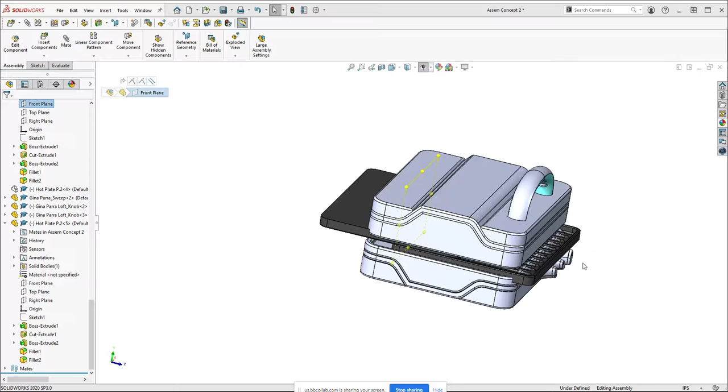So just check your mates. It seems like these hot plates maybe need to be mated with their front plane. I didn't catch that in my notes initially - I mainly looked at this file. You were one of the people where I wrote the note about combining fillets, so just being aware that if it's to the same body. Honestly, some of the stuff you kind of did already. That makes sense.

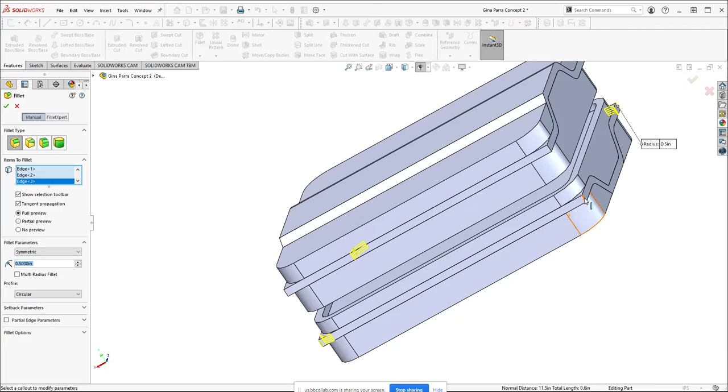Some of the fillets I just had to do one by one because I was trying to select two different faces and it wouldn't do it, so to avoid any issue I did a face fillet. I missed that - was it not working with a regular fillet? No, I don't know, I just found it easier to match the rest of the body. Got it, so really when I did the face fillet...

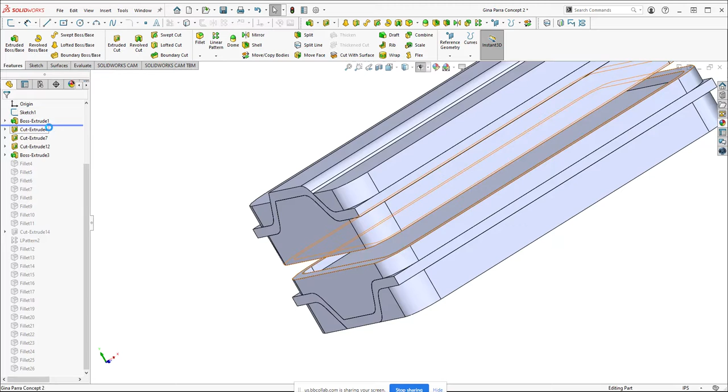I see, okay, so based on that then specifically it would make sense to... I forgot to restart the timer. It would make sense to... let's see, so you started here. This is good, so instead of these cuts being like that, the cut makes sense to me, but for these ones, I see though - this one you had to come up higher. Okay.

One thing you could do if you want to match this exactly would be to create a sketch on the top plane, copy this sketch over - I'm selecting the first boss extrude. Now I'm making a rectangle that's bigger and then doing an extrude cut, so now it's based off the exact same sketch. Now I'm only going to select the two pieces you want to match in the feature scope.

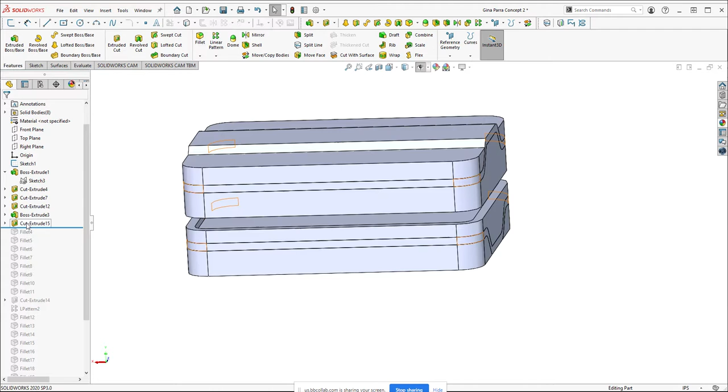So it's only going to cut those two bodies, and again you're not losing points on this - this is just me trying to help you in SolidWorks get to your goal quicker. Does that make sense? Yeah. But I mean, going by fillets is fine - I would encourage edge fillets over face fillets where possible. Face fillets are good if it won't resolve, but you should be able to match these also with an edge fillet if you know this value in the sketch - it looks like it's 0.9.

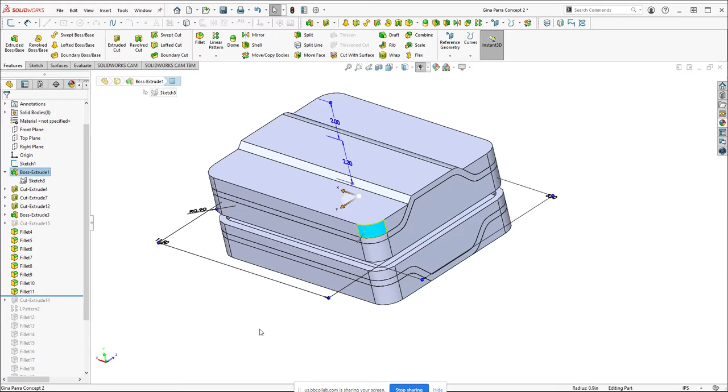Other feedback I had, but again that's not a points thing - I did make a comment on modeling in half for you. So sometimes the feedback is like do this, not necessarily how to do this, but it would possibly mean - and again it's up to you to determine whether you want to invest that time. It's worth 0.6 points. It would look something like this. I would save a copy of the file - oh, that actually rebuilt really well, I didn't necessarily expect that.

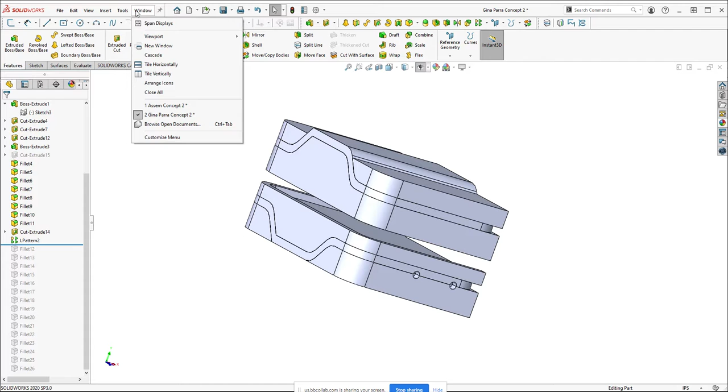Starting here and then putting in - let's see, where would it make sense to put in a reflection? Does that make sense? Yeah. Then the last comment that I have is - again, everything was pretty good. Again, the main thing is just when I see a lot of fillets, sometimes I wonder.

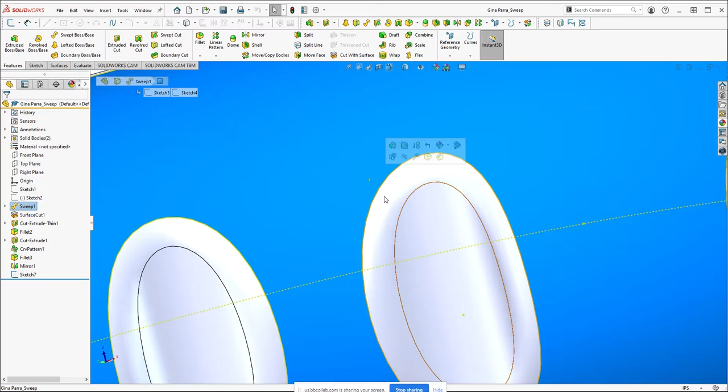The last comment I have is to the handle - I'm assuming you did this body discoloration for rendering, is that right? Yeah, that's okay for this project, but moving forward try to avoid doing that. It won't look as real if you don't have a part line between materials, if that makes sense. It is a good trick, it is a good workaround, I totally do it all the time as well - the face thing. But in general, for realism, if you're having two different materials, it's better to have them separated by something like this.

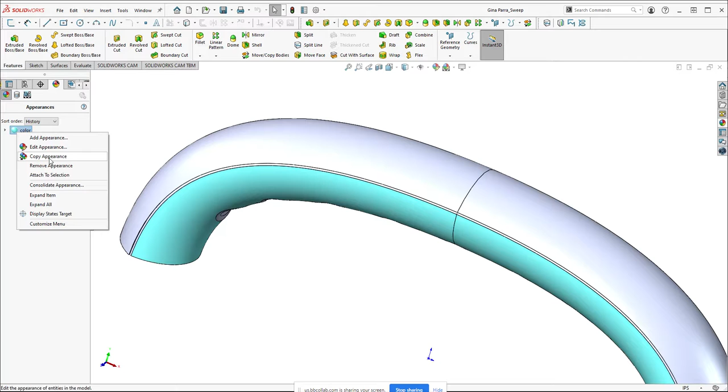I did it just so when I exported to Keyshot, it was easier for Keyshot to know that will be two different materials. Got it, I mean typically, what I'm nitpicking is like this material being different than this one, right? Oh okay, so then I will just do another cut, right? If you wanted this front and this back to be different, the better way to change this color would be to apply it - I'm actually going to just remove the material, edit this and do it to the body. Right click on this material and select body, not face, and now if you select this light blue, it'll apply to the whole thing.

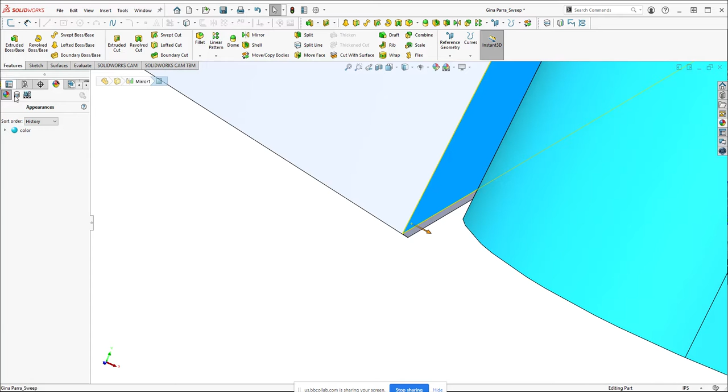Oh, okay, I'm just noticing this now. I would put a fillet on here and double check this. This hanging edge is happening because of this cut, you need to just extend it. You just need to grab this point and drag it down, and that should get rid of that extra tab in there.

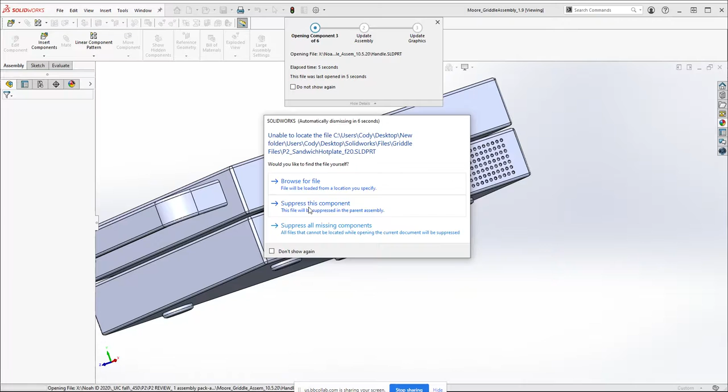Okay, now I did have a note. I should have emailed you, and I apologize. From last class, you had asked about the loft of the slide, and the slide file was missing, so I wasn't able to, or maybe there was no slide in this, so I wasn't able to look at that.

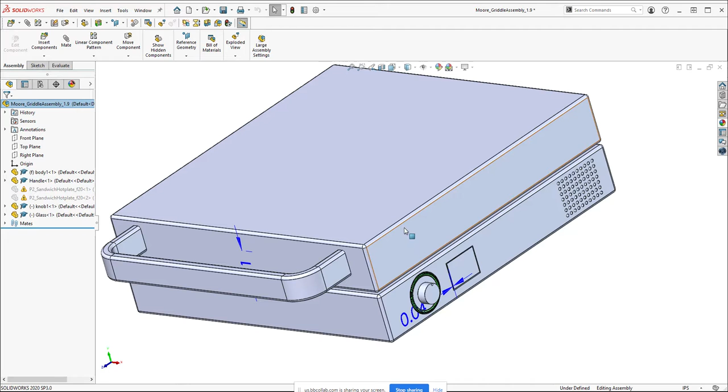But yeah, for you, I'm trying to interpret my notes here. I have something that says MS handle, I'm not sure what that means. Oh, master sketch - you don't have a master sketch in your handle.

Also for you, your handle is not a logical sweep because this could be extruded up and down. So the simplest fix for you would be, I realize this is not maybe purely Dieter Rams, but I think you could make an argument that having slight curvature to the back would make it more comfortable to grip. So adding just even the slightest curve on the back here. And again, I realize I have convoluted rules, but I want you all to understand when it makes sense to use a sweep and when it doesn't. Right now this handle makes sense to be extruded as you had it initially.

So does that feedback make sense? Yep. Without this addition, I would subtract points on the logical part of this sweep. And then, yeah, I mean, you would lose points for not having a master sketch.

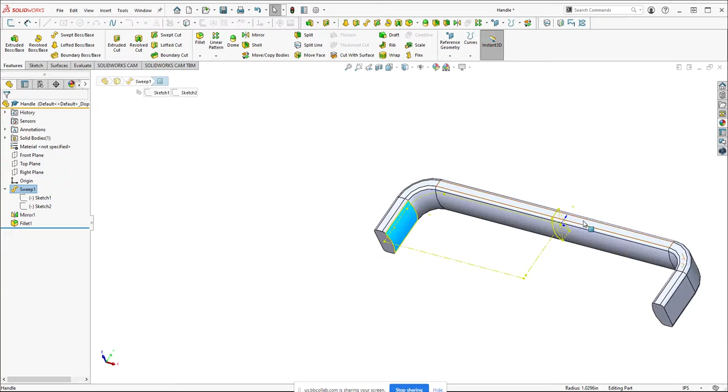Go back and look at the demo. I mean, basically this could be part of the master sketch. The good news is it's a relatively simple file to update that. The next feedback I had, and again, generally everything was good on yours, I think.

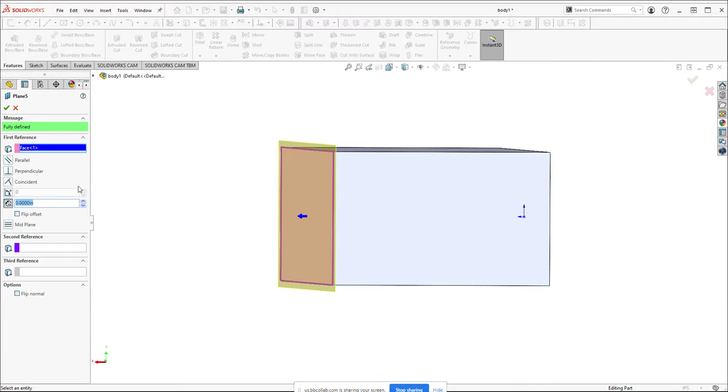I have a comment that says plane 5 is not necessary. Did you understand that feedback when I was talking to the whole class? Again, I don't think you were the only person that did this. Yeah, I understand - to link that to a master sketch to keep the plane mobile, and if you adjust master.

Cool, yeah, I mean, or you can sketch directly on the face. I'm assuming - I don't know what plane 5 was used for. Cut extrude 4 is where it was used first, I think it seems like. Yeah, I got that, I just didn't know you could sketch on face, so I'll make sure to do that.

Cool, and yeah, some of these things, it's like things I forget to say, and it's very possible - that's why I like doing this, because we catch things. Okay, yeah, I think that's all I had.

So let me just double check the assembly one last time. But then we would have roughly a minute left for your question. Let me just drag on things. Yeah, you are good. Okay, yeah, what question do you have?

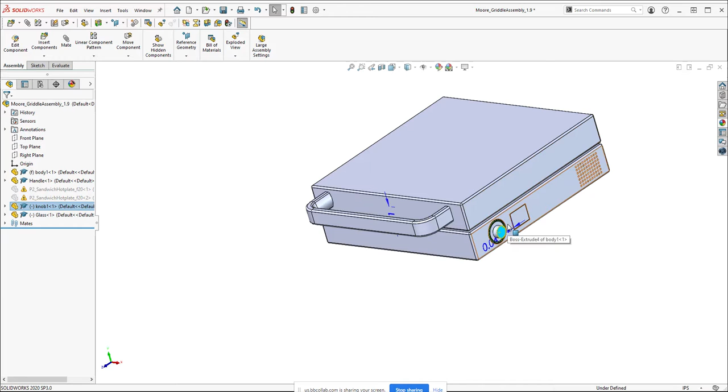Okay, so in that square extruded cut there, I had another part that I added for another part file, for glass or like a clear piece.

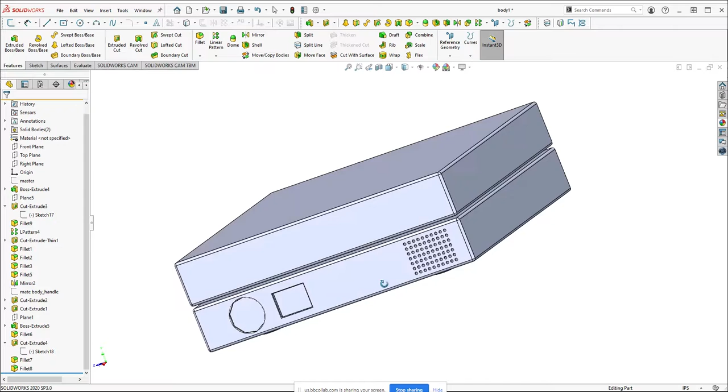In my other designs, I have a metal bracket attached to the body. Should those two parts be in separate part files, or should they be part of the master or the body part of the assembly?

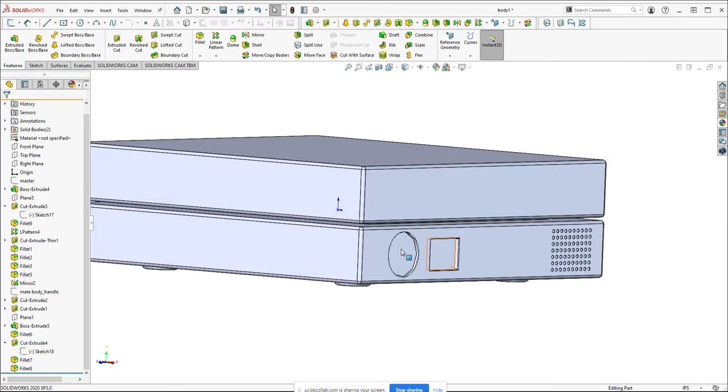Yeah, that's a good question. For this project, there's really no one right answer to that. The short answer is I would have it in this single file.

If you had glass here, I would put it in here personally. I would create a sketch on this face. You could select a face, convert entities on it, and then extrude something like 0.1 deep, or even less, 0.04 or 0.05, and just not merge it with anything. That's the way I would do it.

That's the shortest answer. The reason you'd want it in a separate part file is if, for some reason, you have a screen assembly that an engineer gave you, or you're going into production, you might have that separate. But in this kind of concept stage, I tend to put those things in the same file.

Okay, sounds good. Cool. All right, that's all we have time for. But otherwise, I think everything looked pretty good. So nice work.

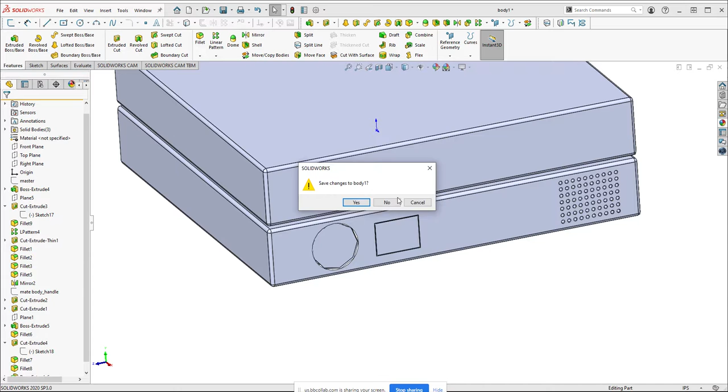And am I still recording? I think everything's going, seems like it's still going. Cool. All right, thanks, Jacob. I'm glad you're there, Jacob.

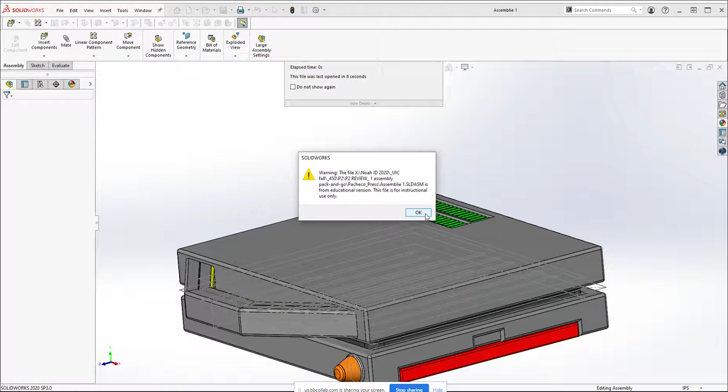Xavier, did you want me to go over something specific, or any specific questions for me, or general feedback? The one thing was, my knob, does that work? Or should I make it like a tiny oval, or have it skewed a little bit so it looks circular?

Because the way I had it here, I feel like this represents the object the most. But if I were to just make it barely an oval, would that work, or is that kind of a workaround?

No, that's fine. If you make it barely an oval, I'll grant it. Again, fully acknowledge it's convoluted, but I want you all to understand when it makes sense to use a loft and when it doesn't. The other option would be like the earlier example I showed, an off-center circle.

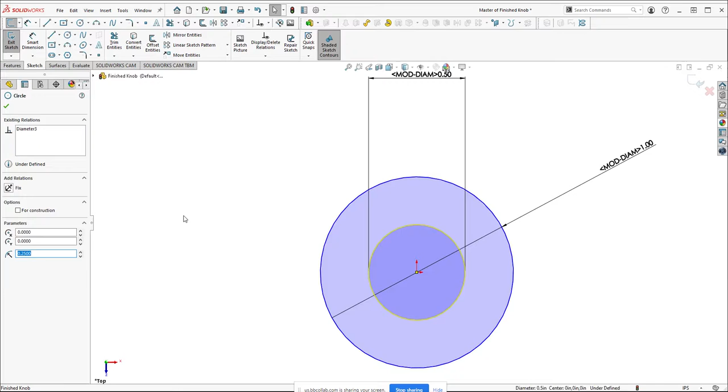Let's see if I can even do this in your master. If you break this off center... nope, they're both attached to each other. I wish there were an easier way to break.

Never mind, yeah, you can do it as a slight oval. If you just drag this circle up like that earlier example I showed, or you can go back and review it since it was recorded. That's one option. I'm glad you brought that up. I'll be honest, I didn't catch that, but I probably would have in grading.

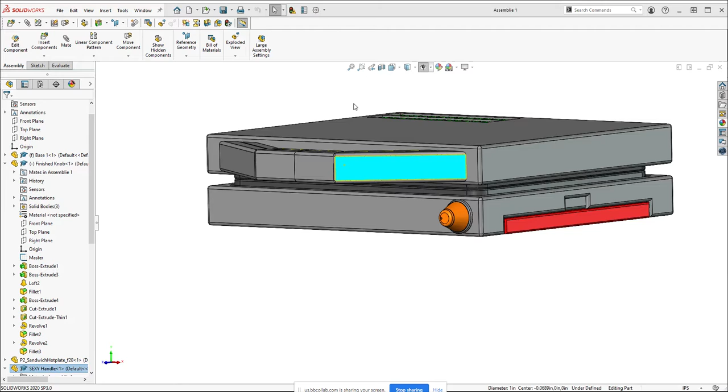Cool, general feedback for you. With the handle, you're another person where I made a comment about the fillets being something that could be combined. This bottom fillet and this top fillet could probably be done in the same command, so just be aware of that. It's not costing you points, but in general you can have a much shorter tree with those fillets.

The next thing is, don't forget to merge. This is mirrored, and I see you have 10 bodies, which is fine, body count's okay. But I'm noticing there's a seam here still. So just be aware that in the mirror command, if you check the merge results—again, not losing points for this, just for your knowledge—

It'll only merge the logical ones. So this left piece will merge to this one, it won't merge front to back.

So I would just check that box. And now you have far fewer bodies, less things to go wrong, I guess, and it's also just better organized for your main body.

I don't think it was built in half, so you may want to do that. No, it wasn't, I realize, again, somewhat convoluted. For you, you would probably want to mirror it fairly high on your tree before you start adding these details and stuff.

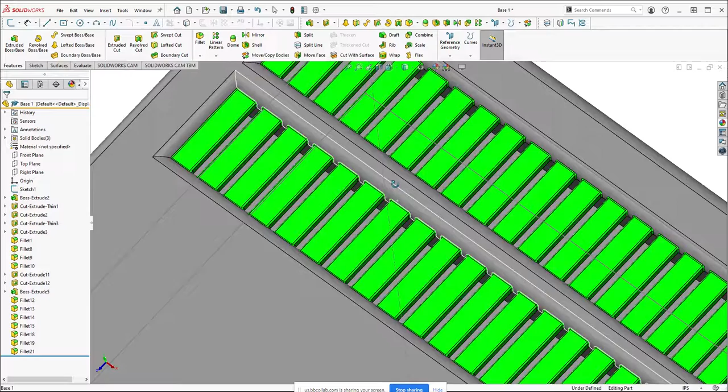But again, it's all just like a habit thing. And then the last thing I have to show you was a question you had asked a long time ago about these. What I did, I think it's in here, is I built... Oh yeah, I was curious if you can angle them a little bit. Yep, I think I was going to ask you that.

Yep, and I think it looks better if you do. It looks more real. And so the way that I did that is with an extrude thin.

So I think what I did in your file is I suppressed it - I think we have time for me to walk through the steps here. I saw where you did this and I suppressed it, then I walked the tree back to this point and selected one of these faces to create a sketch on it. Then I click Normal To, or Alt N is typically what I do, and if you want to see the cavity, sometimes this is where I'll switch to this view.

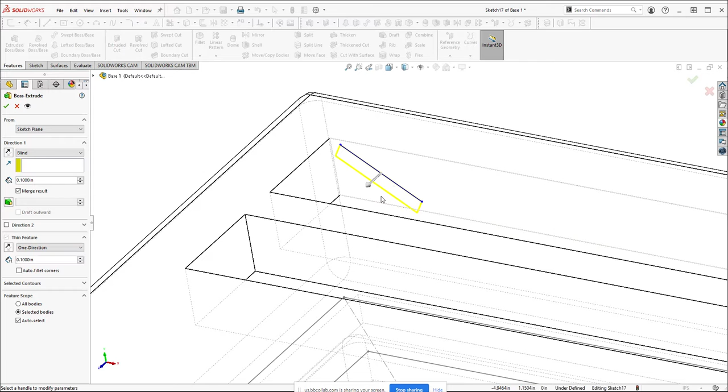And then I just use L for line and create an angle that's like a louver. Then I simply do an extrude thin, so I immediately load a thin command or an extrude command from here. What I think I did is I said up to surface and selected this face. Did that work? Let's switch to this here.

Oh, it doesn't like that. Oh, because I think I made this too long. Let's check and see if that works. Oh, it did work, okay. Yeah, I don't know why that didn't give us a preview. But anyway, to that face, I don't want to merge result.

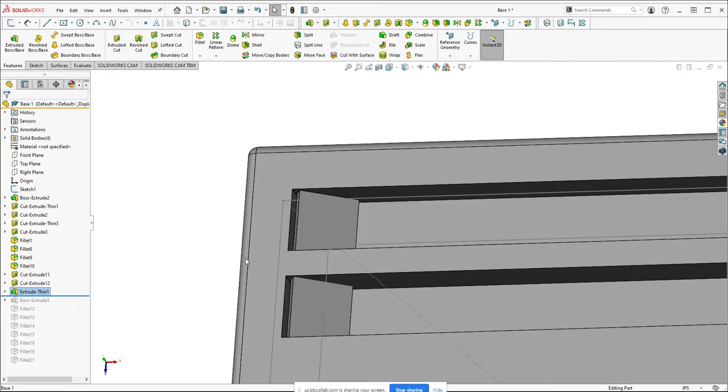And then here we can change the color at this point, so I'll select the body - I think you had it as green. And then I load the linear pattern. For the direction I can just pick this back edge, or probably better practice would be to pick something in the master sketch because there's less chance it'll break.

And then here it always loads features, but we actually want to pattern the body, so I'll click this. And then here it's just a matter of playing with spacing and the number you want.

And I do think it makes sense to angle it this way because I think you're rendering it from this vantage point. If you render it from this other vantage point, you will start to see through it. So those are things I also consider sometimes - like where will it look best from.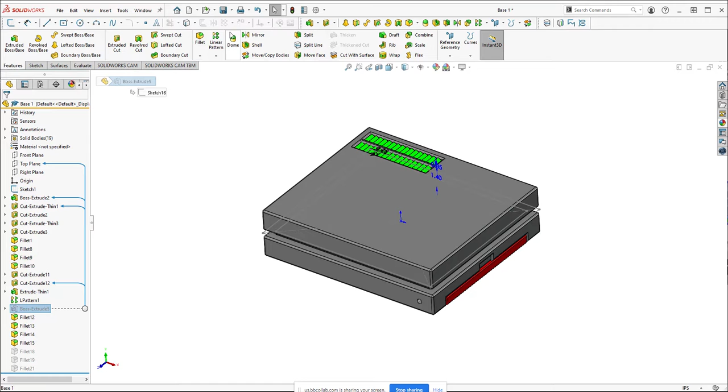Again, I would delete these if you're leaving them suppressed. Yeah, cool, overall nice work. Let me look at your assembly one last time to make sure I didn't forget to drag on pieces. Yeah, you were good. Sweet, nice work.

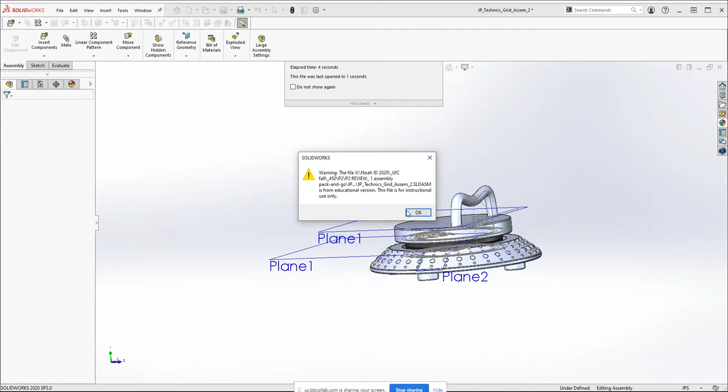Jacob, did you have any specific questions, or did you just want general feedback? Just general feedback. I think I might rebuild the one I sent you just to make the mates a little bit easier, based on the feedback I got from the forum yesterday. I think I might go ahead and do that.

You were kind of talking about doing a square plate with the press just being the kind of angular thing on the bottom. Yeah, square plate, round top kind of thing. Yeah, and then also just any CAD master sketch stuff, if I'm doing that correctly as well.

Okay, so the question I had from last class was you asked about your loft. So yeah, unfortunately this is not a logical loft because this could be revolved. So, okay, go ahead.

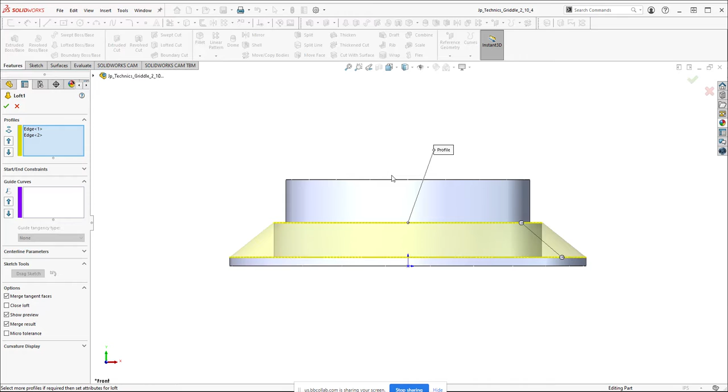Is it necessarily wrong for me to build it that way though, just because it was super easy in comparison, in my opinion? So I mean, yeah, for your own work, I guess no, it's not bad. I mean, there's more of a chance for a loft to fail.

I think if you were working somewhere, or someone was reviewing your SolidWorks work, or you're working with other people, they might question why you did that as a loft. It just doesn't make sense, unless the reason would be if I anticipated the client may want it to be an oval at some point. But anything like this, most people would revolve it.

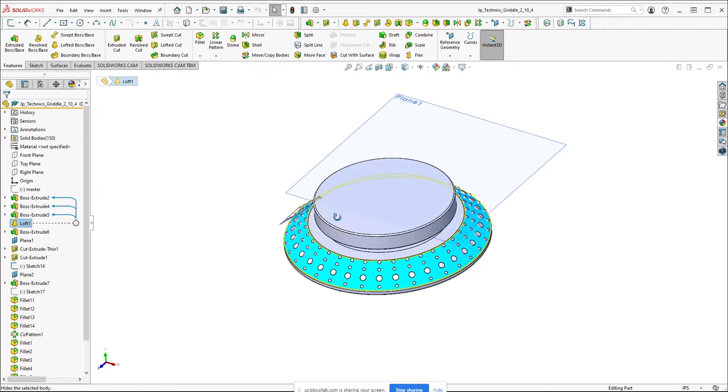Or some people might actually extrude it. You can extrude something with a draft, and if you're talking about the easiest way to do something, you can type in an angle here. If someone were just trying to knock it out and they knew SolidWorks well, that's probably what they would do.

But for the requirements of the class, unfortunately, no, it needs to make sense. So like Xavier asked if he could do it to just a slight oval, so you could do that. Or if you're going with a square base, you could loft a square with fillets to a round, and that's also kind of an interesting aesthetic.

If we had time at the end of class, could you show that? Yeah, for sure. Okay, cool. What that would look like. Cool.

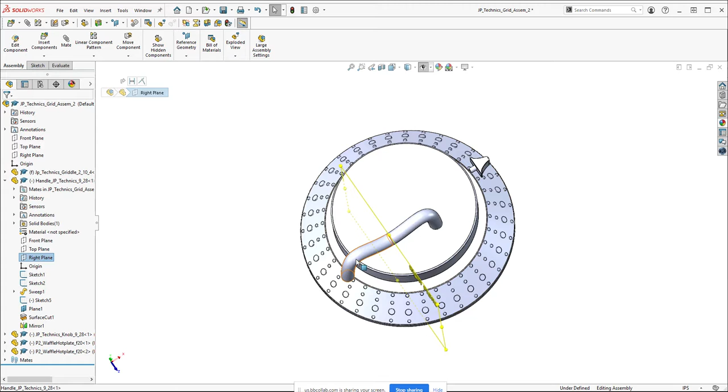So yeah, that's my first thing, because that was a question you had last time. Yeah, definitely just double check your mates. So if it's sliding left and right, the handle needs the right plane to be mated. Same with this guy's moving.

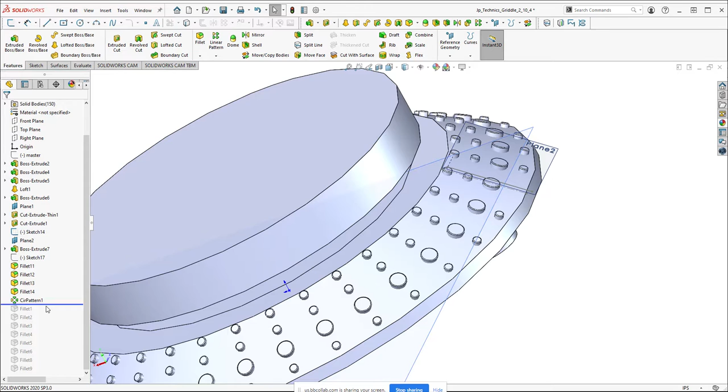I had advice to fillet before you pattern. I think, was it these ones? Maybe you already did that. I think I did that with those. Did I? Oh, I tried to. No, I think you did. I don't know why I wrote that then. But anyway, I wrote fillet before pattern. Yeah, you did. I think I definitely got a little sloppy with the fillets, which is another reason why I kind of want to dive into a new design.

Yeah. You also want to build off of a half. This one isn't built off of a half. Right, I was wondering about that, just because of the fact that it is all circular. Yeah, no, I know.

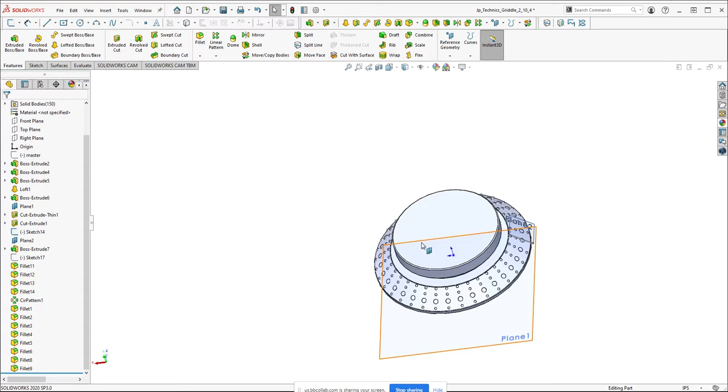Again, I fully admit that the half rule, especially in some of these contexts—if I'm being honest, if this was someone building this in industry or whatever, they probably would just do a full revolve. My reasoning again is all just for giving you all best habits, is really.

Now for this one that I'm probably going to go forward and build just for this final one, that's going to be asymmetrical. Building in half wouldn't make sense, right? Because the circle would be on one side. If it's asymmetric, then you do not need to build it in half. Correct.

Okay, cool. Now, I don't know though, if it's symmetrical front to back, consider that too, right? So like if it just means an off-center circle, don't make that mistake. And again, it's a good habit. I really want to encourage that, so it's not wasting time.

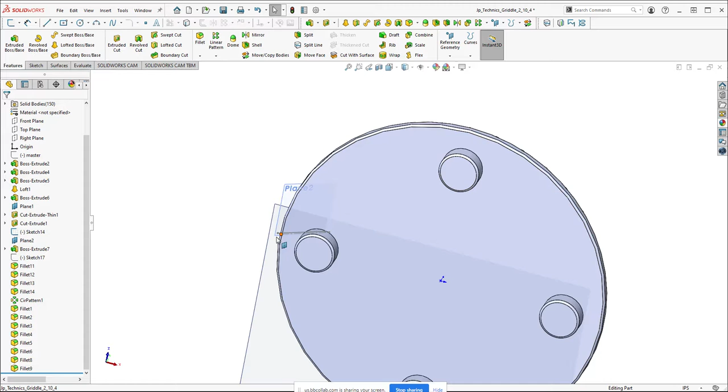And really, in some respects, it might not seem like it, but it should make your life easier, because then you don't have to do a command to one part. You don't have to select two different things. Like, for example, if you're mirroring, you only have to build one foot, right? Which is honestly kind of a pain in the ass, mirroring all those after. Cool. And then my last two comments for you were...

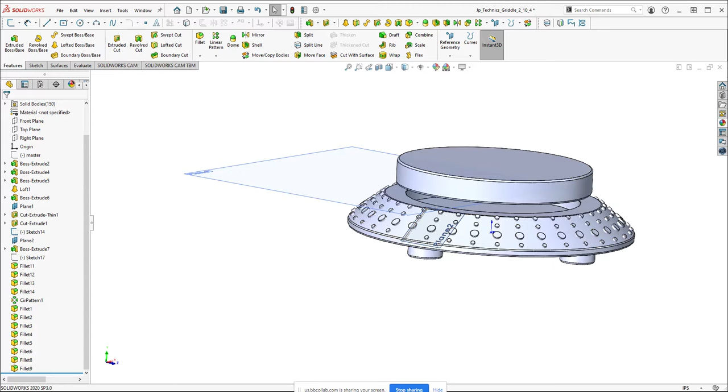Just base a plane on the master whenever possible. I don't know if this was based on a face. Just whenever possible. Sorry, I think that was actually okay. So that was something I wanted to ask you about the handle. I had to make a cut because it was too long, because for some reason the master was just manipulating it, throwing off all the proportions of the curves and stuff. So I cut with a plane.

Got it, that's fine. You could have cut with a regular cut, but I understand that. The planes I was talking about were in this file mainly. Oh, was that? Okay, I was wondering if that was the plane. But just in general, basing planes off masters is good.

Sorry, unfortunately we're out of time, but I just want to get all my feedback in. This knob could be extruded as this shape. I understand this is maybe getting to what Sam was talking about at the beginning of class, where you're kind of exploring the design. And again, you're not going to lose points on this.

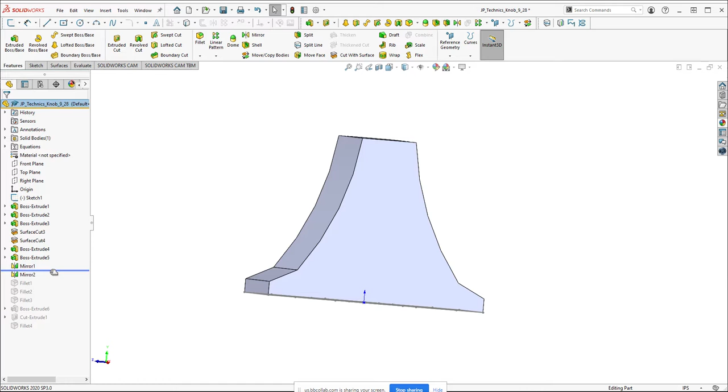I appreciate the mirror here, but actually, no, I really like the mirror, so maybe leave it in there. But really, you could almost sketch this exact profile and then just extrude it. Does that make sense? The complexity of this could probably be built in like 4 commands as opposed to these many.

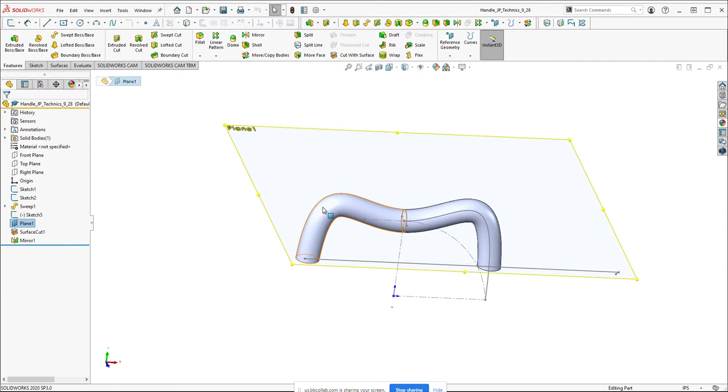I think I noticed for yours, I don't see a bezel or a part line. I know technically there are part lines here in this stuff, but I guess I meant it to be like in the handle or the knob. Some people had it - like if you were to split the base, put a split in here somewhere to represent a part line, I would count that.

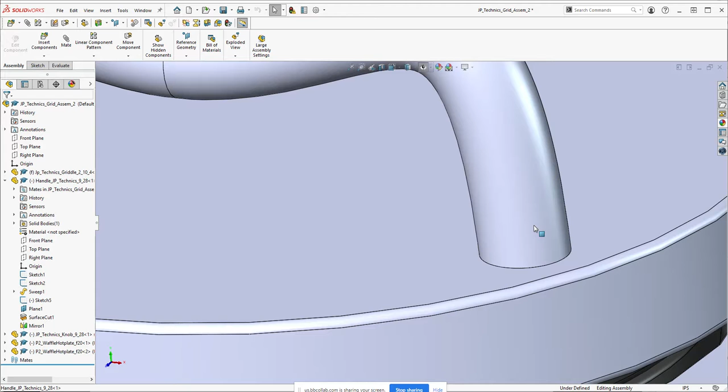I think the simplest thing you can do is just revolve some kind of bezel around the mounting point of where the handle would go. And I don't know if you want to put a part line down the middle of the knob, or I realize you said this was wire, but the logical place would be down the middle of the handle, like the demo showed.

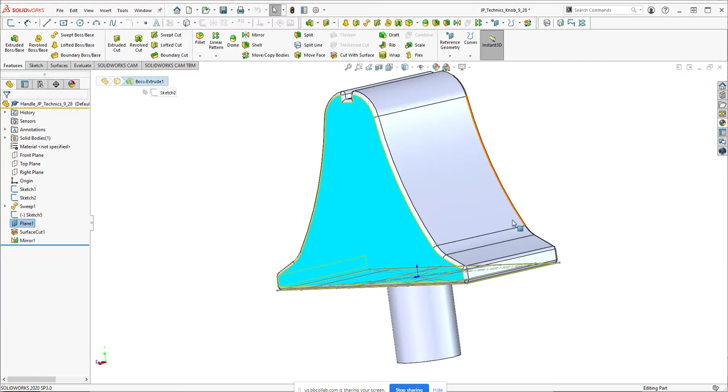Yeah, okay, all right, cool. If we have time at the end of class, I'm happy to show you that loft, or you can always email me and I can show you. Yeah, I'll probably be on here for the whole class, so if we have time. Okay, cool, cool, thank you. Yep.

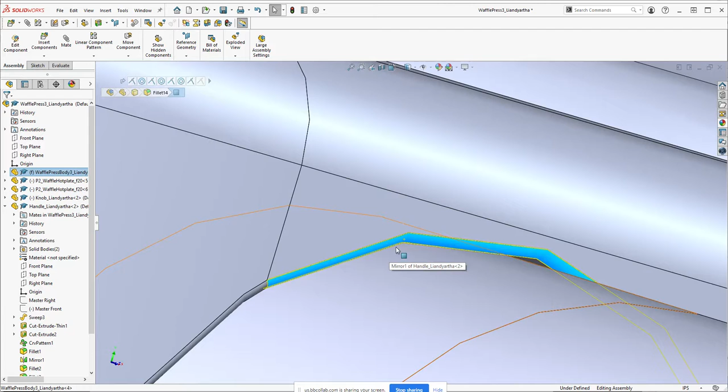I like Phoebe's detail of putting a mounting point for the handle, where there's this fillet here and it goes into a hole. These are things we start to do in the next 2 projects, but I think it helps in a render. It will make it look far more realistic to look like the handle has a home where it gets mounted to. So I appreciated that detail, Phoebe.

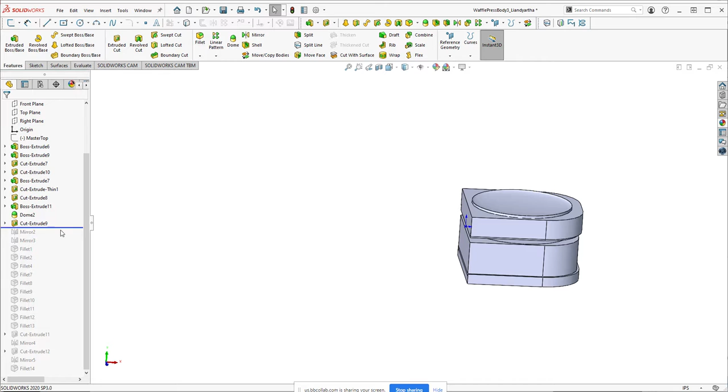Nice work. I think I literally had one feedback for you, which is considering your mirrors here and the order in which you have them. So I appreciated that you built it in half. Things like - firstly, it's somewhat atypical to have 2 mirrors back to back. There's some circumstances where it might make sense, but I think you could simply select this.

And I'm assuming you were maybe not wanting it to merge, but the way the merge tool works is it will only merge bodies to itself. So because this plate is not touching itself, even though this is checked as merge - oh, maybe not? Yes, okay, that's why I made it. Fair, okay, I stand corrected. Oh, I'm curious now, okay, my mistake. Nice, so it makes sense.

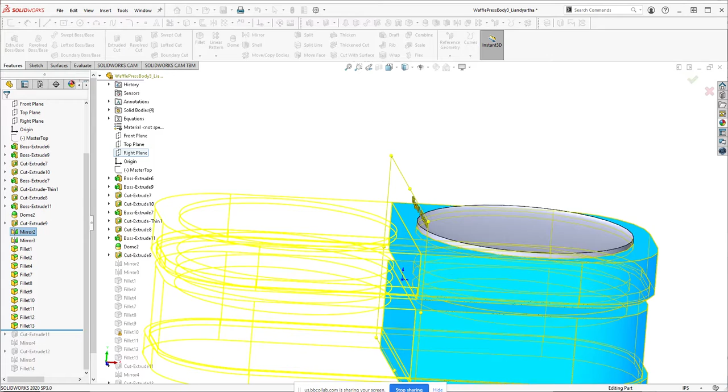So sorry, let me uncheck this and check merge so I didn't break your file. Good to know that, thank you for teaching that to me. These things, I would consider putting before the mirror. So I think you can simply drag these up here. I don't know, or maybe I'm going to be wrong again.

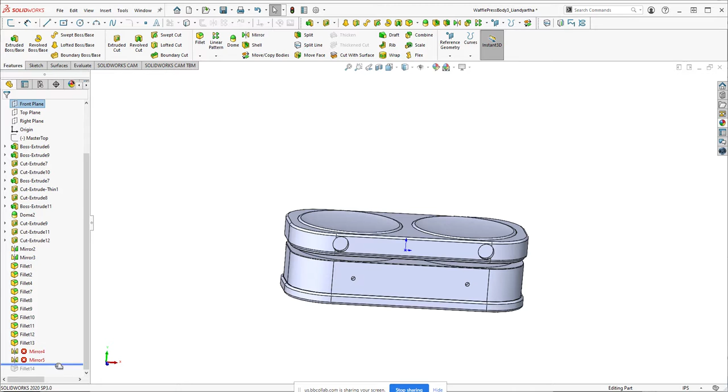Yeah, I added that last because I was thinking, where should I put that? So I just built the whole body itself, and then added that. But later on, the update, I'm actually working on that for a different file, like combining the mirror. Okay, for that.

Wait, say that again, you're working on what for a different file? Combining the mirror, because I have different mirrors for the handle and the placement of the handle, like the circle. But if I can put that combining into the body itself, I only need one mirror. Got it, yeah, cool.

Another SOLIDWORKS habit is using the blue bar, but I also know sometimes it makes sense to see the whole file, maybe you're adding it based on where the handle's located. A quick fix is basically what I just did, where you drag it before the mirror, and then you can suppress these, or this one would have to be based on this.

Anyway, it seems like that makes sense. But honestly, everything was good. It was solely this thing down here. Let's see, I don't think... yeah, I looked at the knob, the seam was good, it was built well.

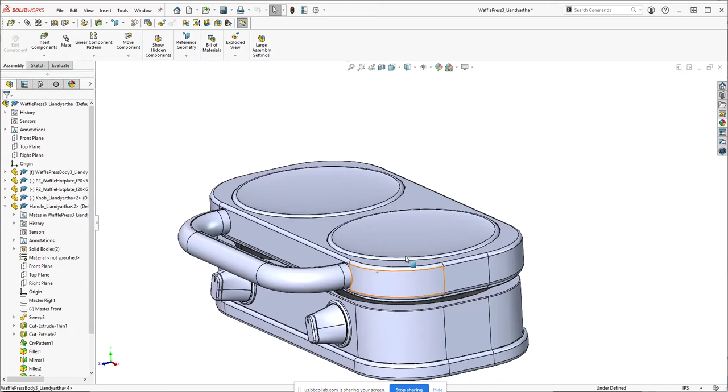Cool, do you have any questions in the remaining couple seconds we have? No, maybe just design wise. Go ahead. Just general design feedback, I like it. I think your proportions are good. Maybe this is a bit wide.

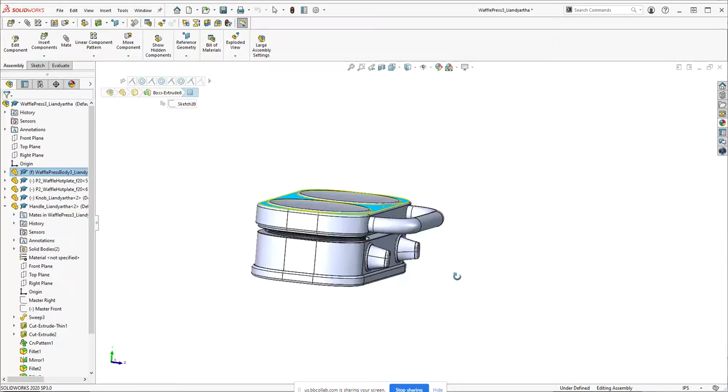The gap like this is maybe a bit wide if I'm being super nitpicky, but it feels right, it feels real. I might consider that if these are plates sitting in here, when the lid opens, they might fall out. But if you're talking about aesthetics and proportion, I think you're good, it looks good to me.

Maybe a bit tight here if I'm nitpicking, but you're totally fine, I think you have good spacing. I also appreciated this part line in here, from this piece to this piece, that was a nice detail.

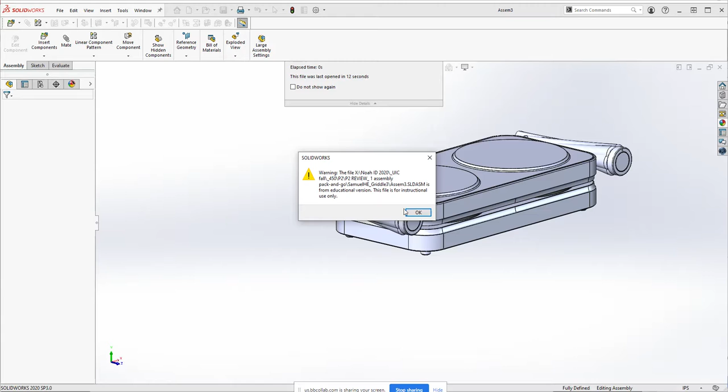Sam, did you want general feedback, or did you have a specific question to go over? Just general feedback. Cool, I appreciated how you built your handle, it's really cool. It's funny because when I was first looking at it, I was ready to say you should have built it in half and mirrored it, but I realized that wouldn't work because it's a full twist, so nice work. I actually chopped it in half from the other handle because I used a full handle on the other one.

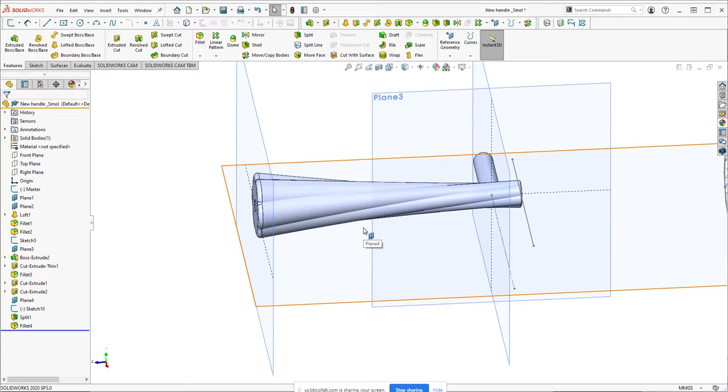Okay, these planes, as much as possible, base them off the master. Does that make sense? Wait, what do you mean? Base them off the master sketch if you can. I also noticed in some instances it looks like you made a plane. I made the planes directly on top of the top, front, and right existing ones, because it's easier to align them in assembly. Got it, and that's what I assumed was your reasoning, so to the tree, and I just clicked the plane.

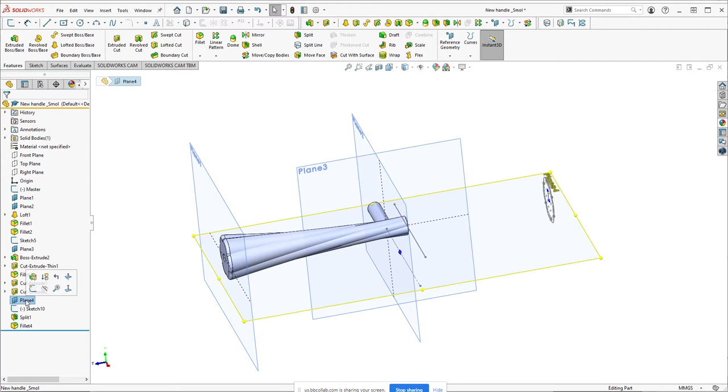So let me help you by saving you a step, that's totally logical, that makes sense to me. If you right-click on any of these planes, if you want to see them, you can right-click and just click the eyeball, and then they'll be visible. Oh cool, I didn't know that. Yeah, no worries, I've never said it before. If that's the way you like to work, there may also be a setting somewhere in here that just always makes planes visible. I'm sure it's in here somewhere, so just be aware of that.

What else? Yep, I think I wrote, okay, I'm assuming this is to the main body now. I think all your assemblies were good.

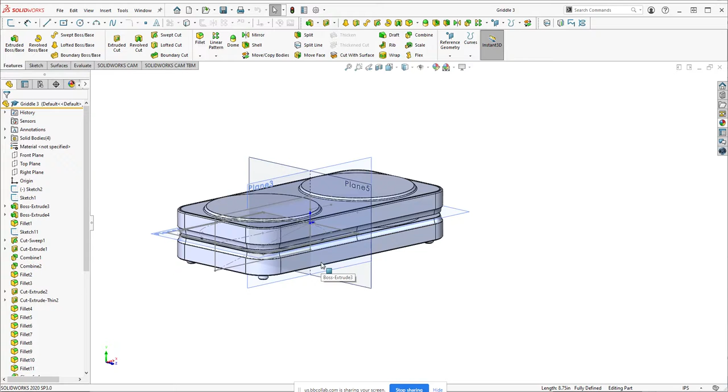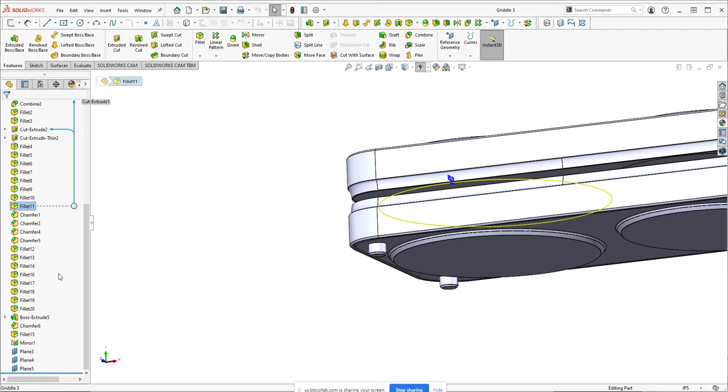Combine fillets and mirror top and bottom. I wrote combine fillets with a question mark because I don't know if they could actually be combined. When I see a lot of fillets like this, I start to wonder if some of them... if it makes sense, like here you have a fillet here.

Does the bezel refer to a chamfer or a fillet? In the PDF guideline you sent, it said have a bezel on each part, so I did chamfers and fillets because I didn't know which it was. Got it, no, that's a good clarification question. I'm going to make a note of that to say at the end of class. A bezel is like what's around the knob.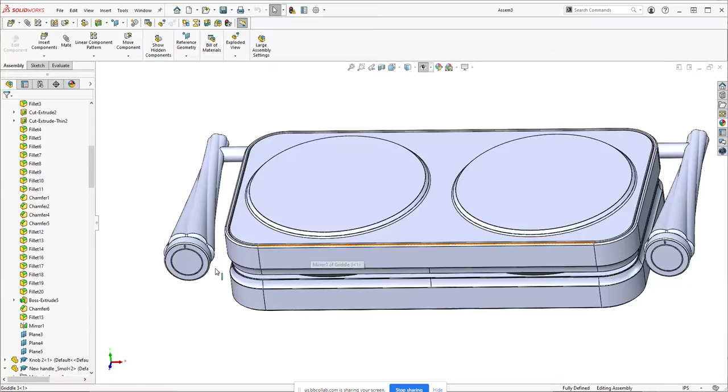Actually, technically I would need to look at your render. No, never mind. Because I did fillets on my chamfers too in some cases. So a bezel is like an aesthetic flourish, in a way. It often hides mounting points or covers for mounting points. Oh, I see, I thought you were referring to fillets. No, I mean, I like this detail. I like what you have here.

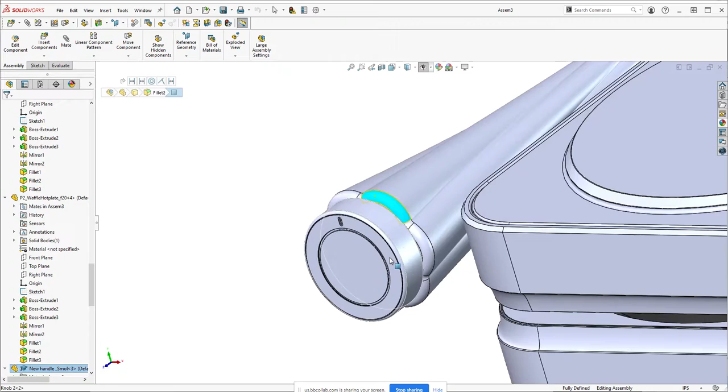I made a note for the bezel that for yours it's like a squiggly line. In a way, the knob being on the handle serves as kind of a bezel. I would say if you want to get the bezel credit, I would accept it if you were willing to split this. So in your handle here, if you just draw a line here, I noticed you used the split command. If you're comfortable with that, you can split, click here and click here, and keep both, just check that box. Then if you put fillets on here, it'll look like a different piece.

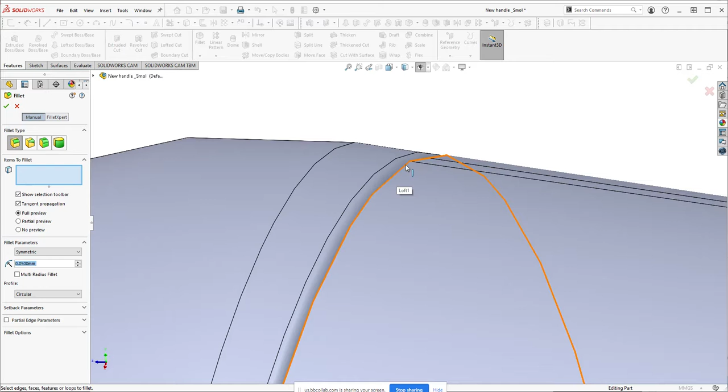If I can select this edge... oh, I see what you mean. Yeah, it's not letting me select it, but it wouldn't align properly once you twist. I would be willing to count this as a bezel if you're willing to do this to your design. So then it becomes like... ideally you would then render it as an accent cap, like this might be metallic and this might be rubber or something. Does that make sense? Yeah.

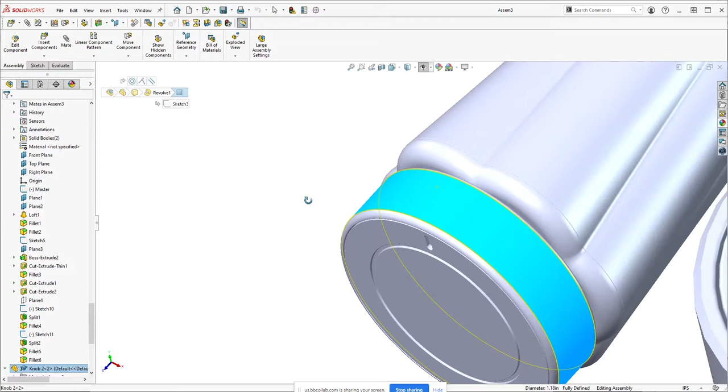I was thinking of doing something like that, but once you twist the knob, it wouldn't align anymore, so I just went with a round knob on the spiral thing. Got it. Yeah, the misalignment, no—this doesn't spin with the knob, the bezel stays fixed. I realize that's confusing because the way I approached the knob design and how we have it mated, the bezel is spinning with it. But typically bezels don't spin. Actually, it works in both cases—sometimes they spin, sometimes they don't. I've seen it done both ways.

So do it to the handle. Yeah, I agree with you, we don't want this to spin because we don't want it to be misaligned. And if you're fine with that aesthetic, I'll give you credit for that. Cool? Okay, all right, nice work.

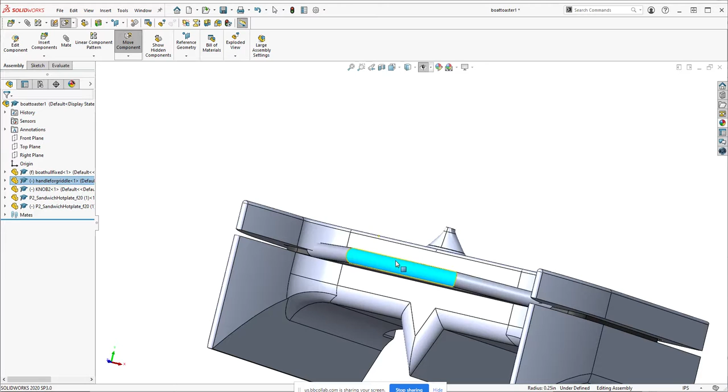Well, I uploaded the one that I was most concerned with, the building aspects of it, and I felt like the file was kind of messy and whatnot. My one question is about the assembly of the handle to the griddle, because it still moves up and down, and I thought I remember you saying that needs to not happen. Correct, yeah, so that's a question for sure, so the fix there... you had it visually placed where you wanted it, so it's going to be this plane.

I still don't have a good way to put this into words, but if this is what's moving, it's the plane that's perpendicular to the travel. So in this case it would be the front plane, perpendicular to the direction it's traveling. I would mate the front plane to any other parallel plane in the main assembly, in this case the top. So what I'm going to do is click mate.

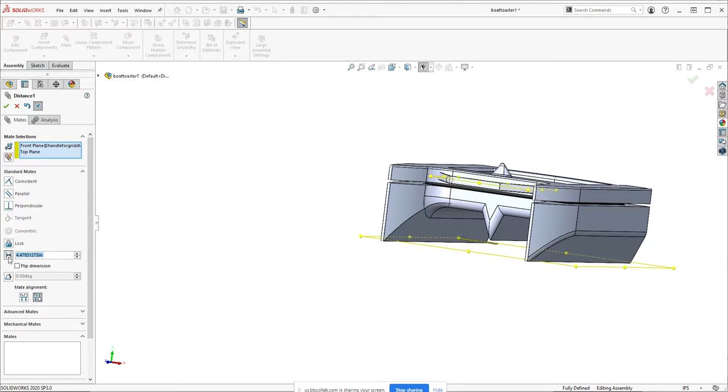It'll jump down, but now if we select distance, it knows the number where it moved from, and it'll automatically put that number back in. So that's the key there, clicking that one and then just checking that box. Okay, and now it's not going to move.

And then yeah, go ahead. One more thing, I don't have an indicator on my knob, and I built the loft in halves instead of quarters because I wanted it to have more of a point. So it's already kind of like a pointer shape, pointing in a specific direction.

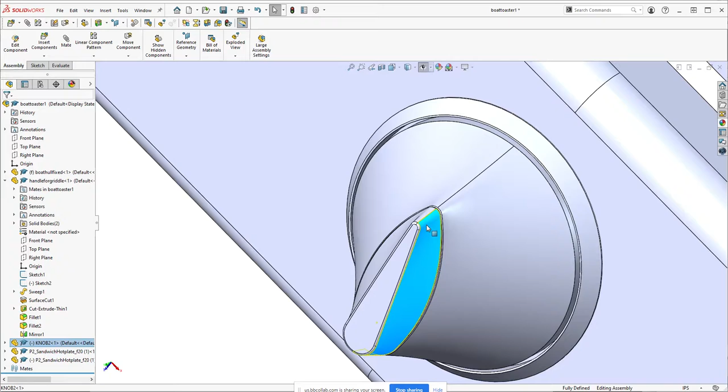Totally, no, I count this as an indicator personally, because it has a clear arrow. For me an indicator is more of a functional thing, I guess. Yeah, so you're good, and yes, I understand that you built this in half.

I think I didn't have any comments on the knob. I think it was good. I want to make sure that there's no seam on it. Is there a seam? Yeah, no, it's good. Okay.

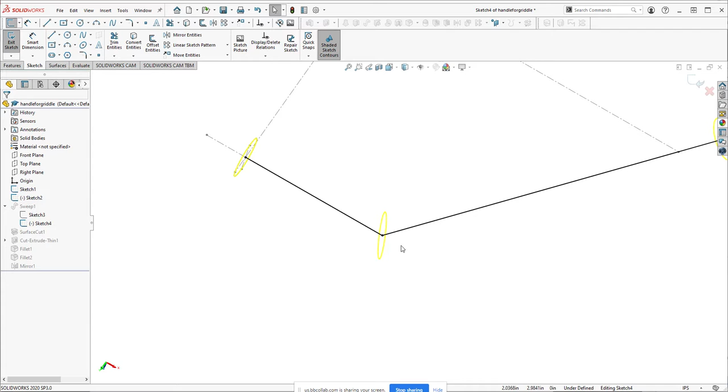Handle, yep, handle up and down. Oh yeah, okay, yeah, just some general things. I don't know, this is kind of nitpicky, but for me, the sweep, I think it looks better if you just put in a tangent bend here.

So the easiest way to do that is open up this sketch. There's a sketch fillet command. You can type in whatever, the default value is 0.1 which should be fine, but obviously you can play with that to whatever you want. And you simply select both lines and then just check this box.

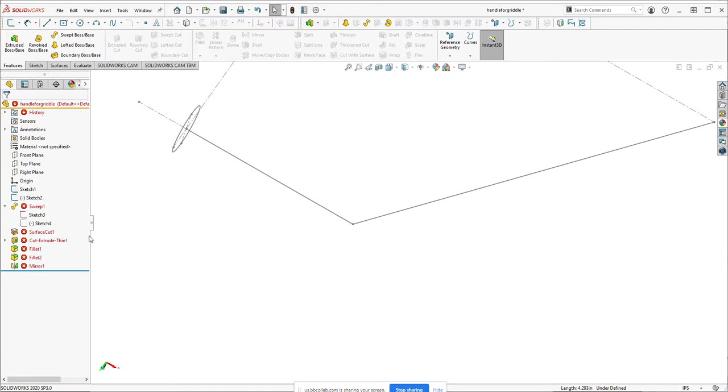And it should rebuild. Oh no, it didn't like that. Oh, you know what, it's probably because this radius has to be bigger. Yeah, this radius has to match at least half this distance. So I don't know, maybe if aesthetically you don't want it you can leave it out, but I think it'll look a bit more realistic if it has that in there. So 0.5 worked, 0.2 did not work.

I did notice this, which is something I mentioned on Gina's. This little corner happens if, in this command here, what you need to do is edit the sketch and just grab this point and drag it down. And what's happening that creates that corner is the cut wasn't going all the way through.

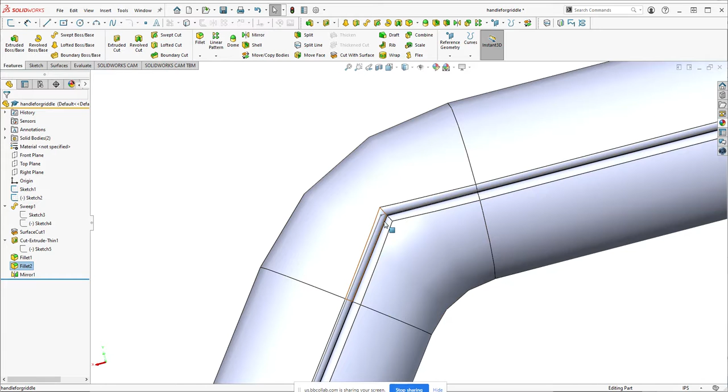So now it gets it. I don't know if I ruined something. You may have to reconnect the fillet on that face. I guess a note to mention is if you are going to fillet this, then this cut command should also be filleted.

The easiest way actually would be to, well, yeah, I guess the easiest way would be to just put in the exact same fillet here. I think it was at 0.5 is what we said. And that way it's just a little bit cleaner. The fillet in here is totally design nitpick, you're not going to gain or lose points if you don't want to do that.

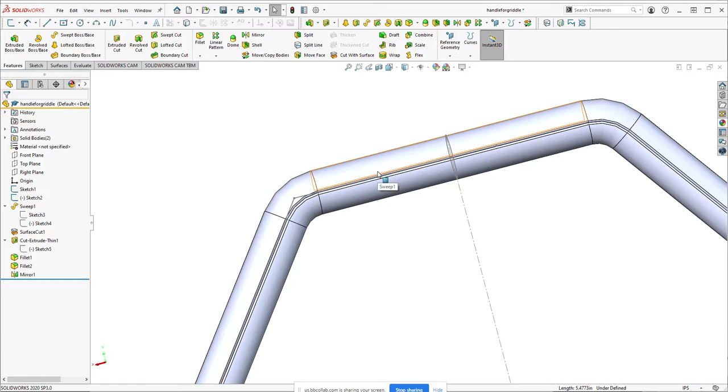Sorry, unfortunately the timer went off, but I didn't finish. Let me just quickly go through the main body.

Yeah, I think, well, a couple of things. One, I would say the main thing is this mirror - the default is to do it as a feature mirror, but it's better to do the mirror as a body. So if I load the mirror command and we mirror about the right plane, you want to look for this option here.

I hate that SolidWorks prioritizes this. You want to select the bodies to mirror and just select this. There's less things to select. It's also going to be more robust in terms of the file breaking or not breaking.

Okay, let's see, I made a note about - what is this? Boss Extrude 2 face. I'm not seeing Boss Extrude 2, is that on something else? Oh, maybe it was the Extrude Cut. Okay, yeah, it's probably this one. Oh yeah, same comment for you.

Actually, I appreciate that you did this based on a sketch, but you can totally make this sketch on this face too. But yeah, this was early on when I was still trying to figure out the whole program.

Got it, no worries. Based on what I said earlier, using planes is generally better, and basing planes on sketches is generally better too, so that's okay. I just wanted to make sure you knew you can sketch on a face.